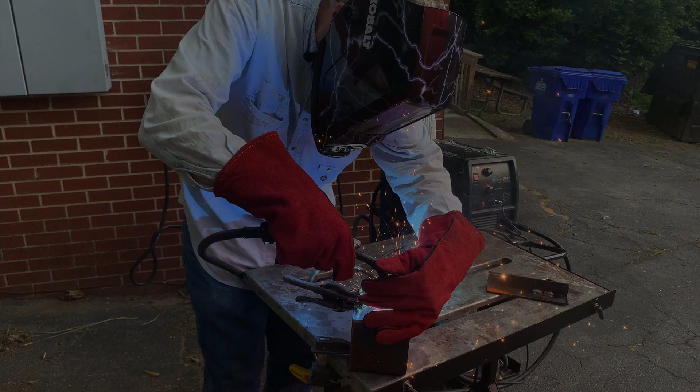Hi, I'm John Schellenberg. I'm a teacher at Renfroe Middle School, and I'm also a Decatur maker. My primary focus is welding and metal stuff. So I'm going to walk you through setting up the MIG welder today. We'll talk about some safety, some tool setup, where you'll have to go to get the key, and some of the other things that you'll need to know about the machine.

We're here on the pad right beside the back entrance to the makerspace, and the metal shed is where the tools are kept. You'll have to watch this video, take an online quiz, and then you'll need to come in for your hands-on safety check. Once you've passed those, you'll get the key, and that will let you unlock the metal shed, and you'll have access to the tools.

So you'll just slide the doors open. And this will be the machine that we're talking about today on video. This is the MIG welder that you'll be using.

So inside the metal shed here, tucked in along this wall, there's a big bin that has some welding gear, okay? And personal protective equipment is really critical for welding. The arc temperature is about 3,000 degrees, and it's lots and lots of UV light. So if you have sensitive skin, you will get sunburned on any skin that's exposed.

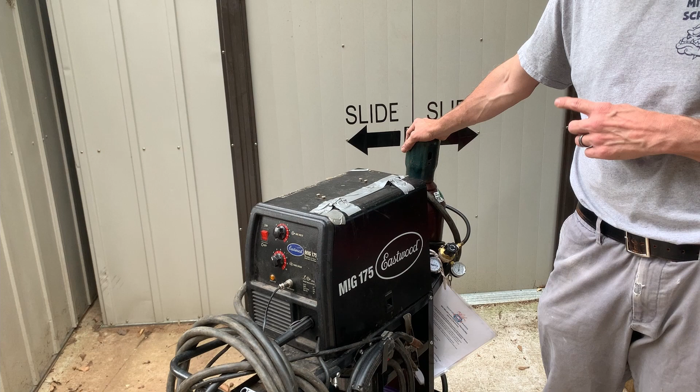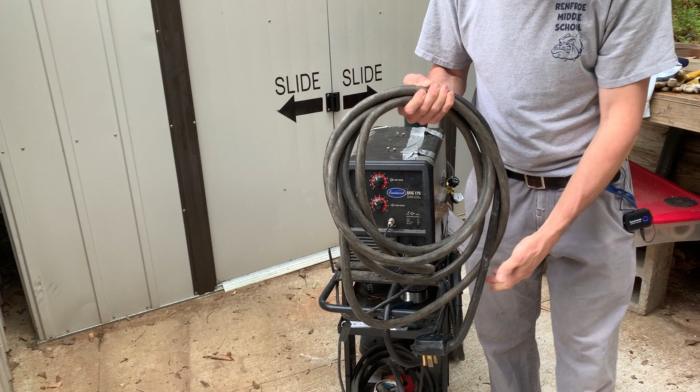All right, so starting off, what we've got here on our cart is the power cord. Okay, this plugs into 220 only. There are two 220 outlets. There's one by the back door, and there's one by the front door. If you drive a Leaf, you know where that one is.

And on the front of our machine, which we'll plug in here in a minute, we've got our operating controls. We've got the power button, and we've got the temperature or the arc voltage and the wire speed. We'll talk about how these work together when we start welding.

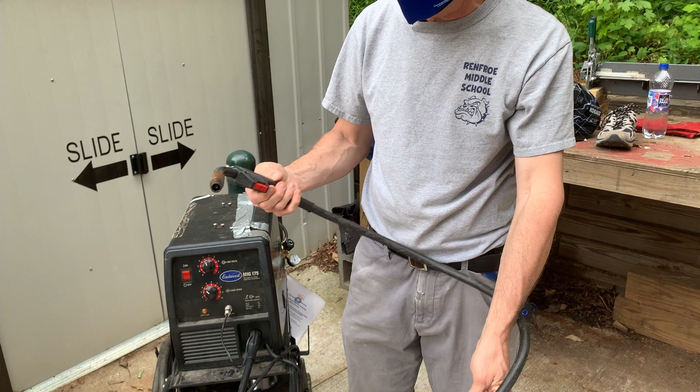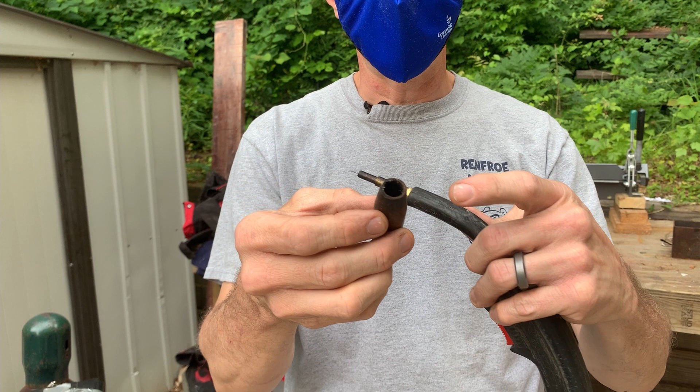We've also got a plug here that allows the machine to talk to the welding whip. Okay, and so this is what makes the magic happen. We've got a trigger here. This initiates the arc, and this will start your welding. We've got a nozzle, and the nozzle comes off by simply unscrewing it. You always want to make sure that the nozzle tip is clean on the inside, because that will fill up with some welding slag there. We'll talk about that again in a minute.

The wire comes through the machine, through the welding whip, and comes out through the end here. And this piece gets burnt up pretty easily, but it is quite easily replaceable as well. Okay, it shouldn't really ever be more than finger tight. So if you need to replace it, you may have to cut the end of the wire off, but you should just be able to screw a new tip on there.

Okay, if you notice the little tiny hole here, that's where the gas comes out. So if you don't have the nozzle on, it's not going to protect your weld, and we'll talk about what that looks like and sounds like here in a minute. Okay, so you have to have the nozzle on, and the wire kind of needs to be sticking out a little bit when you get ready to weld.

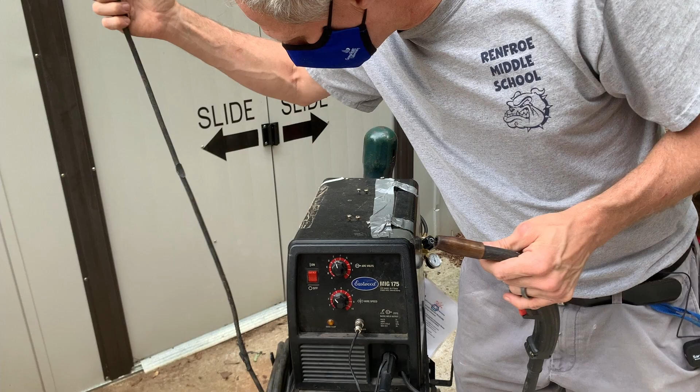The other important part of welding is the ground. So what happens here is basically you ground your work, and the machine basically creates a short with the wire. So that fuses the metal together. So if you don't have your ground clamp attached to your work, basically it's not going to work. Okay, so we'll talk about that a little bit more when we get some metal out and we actually do some welding.

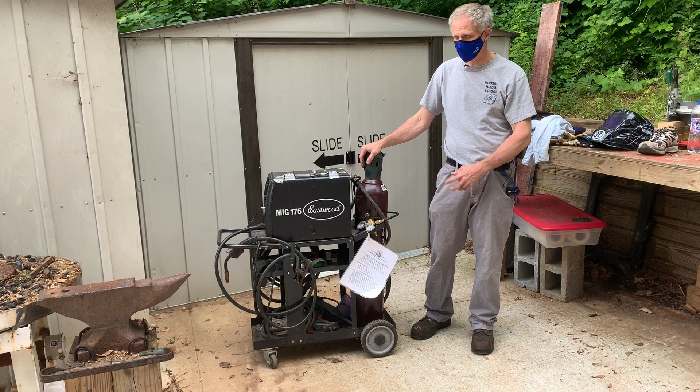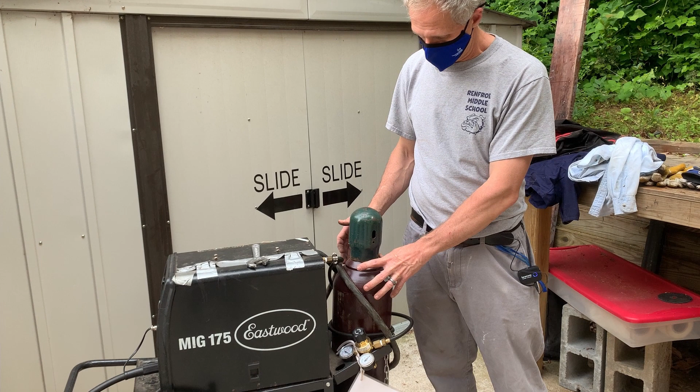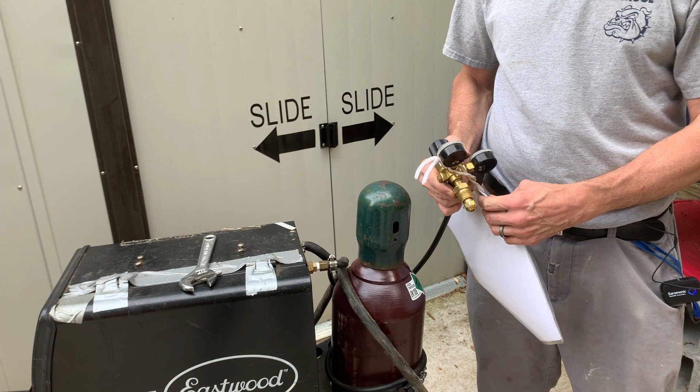Before we move to our welding spot, I'm going to talk about how to put the regulator on correctly. Again, never transport the welder with the regulator attached to the gas bottle. These things are about up to 2,500 psi, and if the gas bottle tips over and the regulator breaks off, it basically turns into a missile. So always transport the welder with the gas bottle with the green helmet on, or whatever color the cap is.

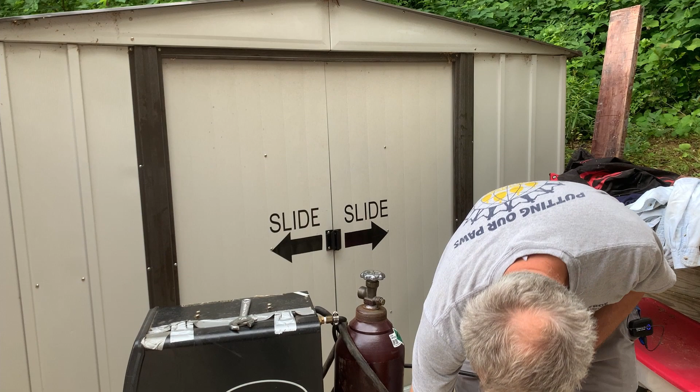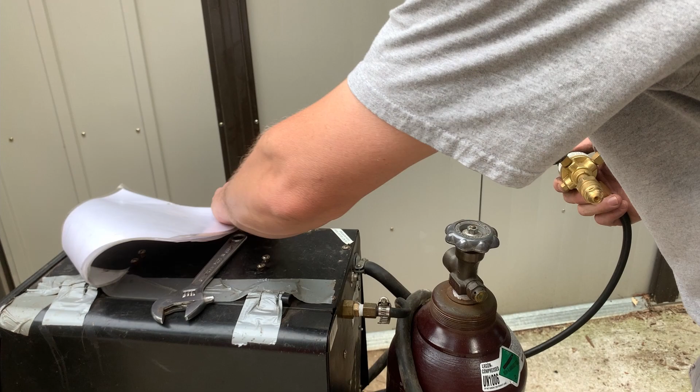To put the regulator on, you'll just untwist the cap and take it off and set it on the side of the welder right here so that it's always with the welder. Then you'll take your regulator and you'll need to position the regulator with the outlet of the bottle, and then you're going to want to screw this part in. Okay, this is the sealing surface, so you really want to make sure that that's clean and not been nicked. This should always stay in a protective bag.

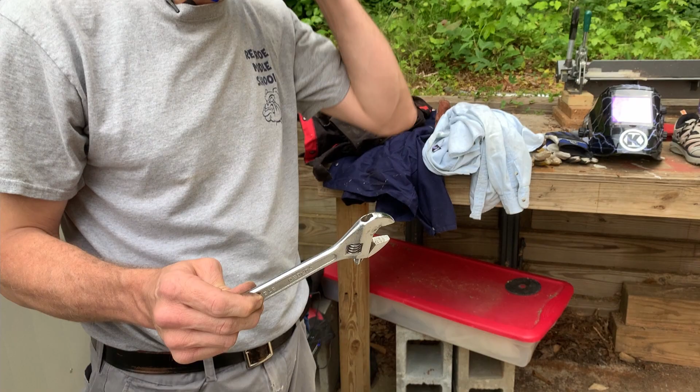Hand tighten it, and then you need to grab an adjustable wrench like this. Do not use pliers. I repeat, do not use pliers or vice grips. It needs to be this wrench or an equivalent. Okay, you just want to snug it up. All right, don't overdo it, just snug it up, and then you can take your wrench off.

Okay, these gas bottles seal all the way open, so you have to untwist, and there are directions here for closing and opening. You have to untwist all the way out until it locks in the open position. Otherwise, the needle inside the bottle will leak. Even if this is tight, it will still leak out of the handle. So always make sure this is locked out all the way open. Okay?

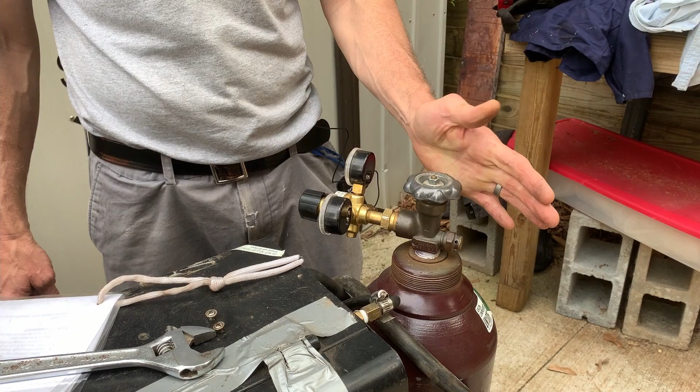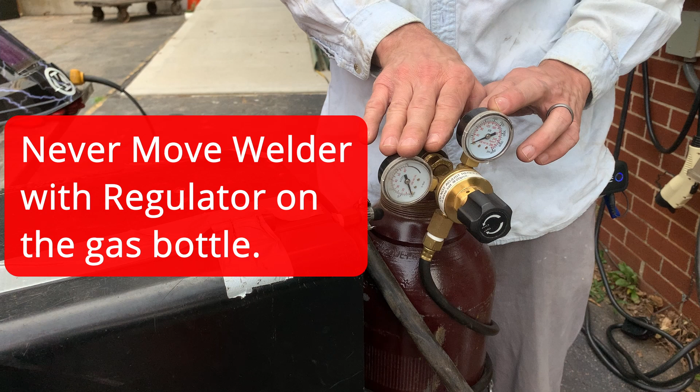We've moved the welder from the metal shed and the pad down to the front of the building where the 220 outlet is. All right, and this is the front building here. So what we're going to do next is talk about our gas settings on the regulator. I moved the welder down here with the cap on, and now that we're almost ready to weld, we have put the regulator back in place, and we've tightened it up with our adjustable wrench, and we're going to turn it on and set the gas to the right volume and flow.

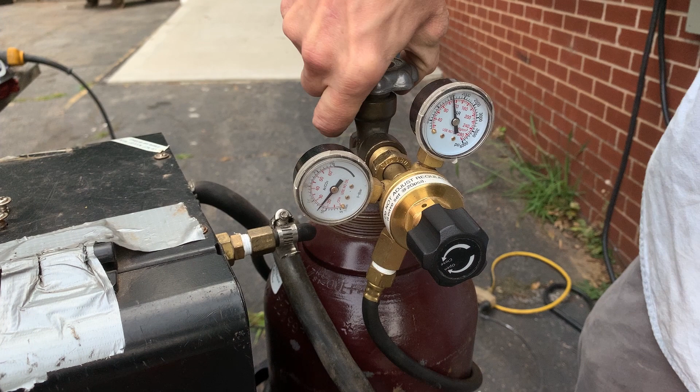Remember, you want to turn this gas nozzle all the way on until it's tight in the up position. You've got two gauges here. This gauge talks about the pressure inside the tank. A full tank is probably 2,500 psi, and an empty tank is down to about 100 psi. You don't ever want to run a tank out, or moisture can get in and that damages the inside of the tank.

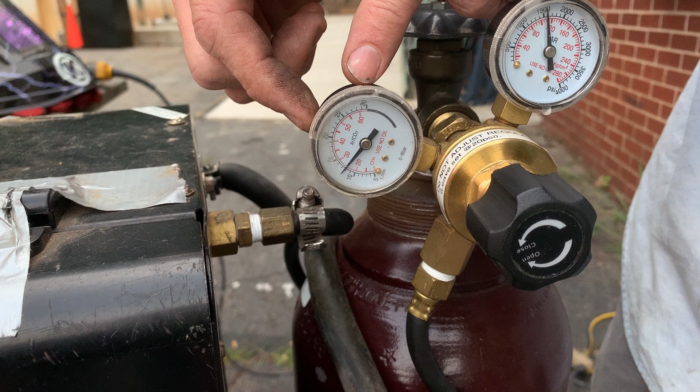On this gauge, you want to have your working gas flow at about 20 CFH. That's the red, okay, the inner red. Right now it's at about 25, but as soon as I start welding, it's going to dip down to 20, and that's about where I want to be, okay? That reminder is right here on a sticker, all right? There may be times where 20 is a little too much, and there may be times where 20 is not quite enough, but that's a pretty good place to start for everybody's general welding use.

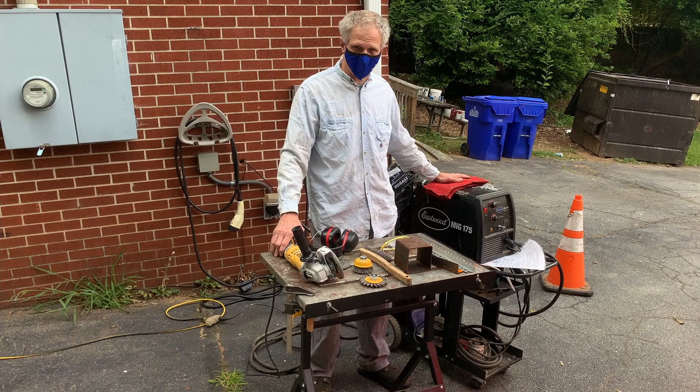So we're in position to weld now. We got our welder down, we've hooked our regulator up. We moved the welding table from the metal shop down here. This gives us a really solid base to work on, and most importantly, it gives us a position to ground

our work with. Okay? We've also got our welding curtain set up, and the purpose of the welding curtain is to keep passersby, traffic, and people walking on the sidewalk from experiencing a flash burn from seeing the welding bead. So that's protective for other people that aren't here wearing a welding helmet.

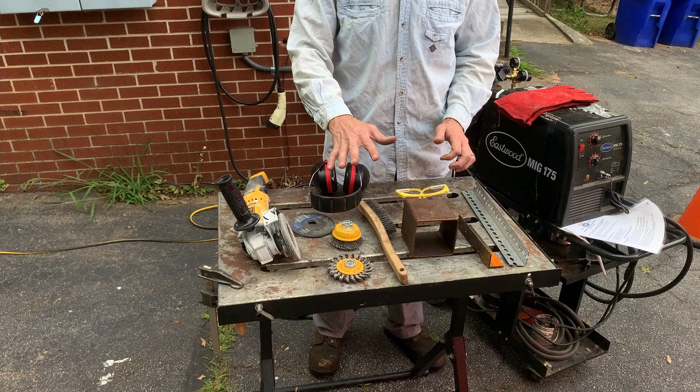Now, on our welding table right now, we've got a couple pieces set up. I've got a couple different pieces of metal. I've got some additional safety gear that we're going to wear, and we've got a couple of different grinding tools. So I'm going to put my safety gear on first, and we'll talk about some of the metal that we've got here.

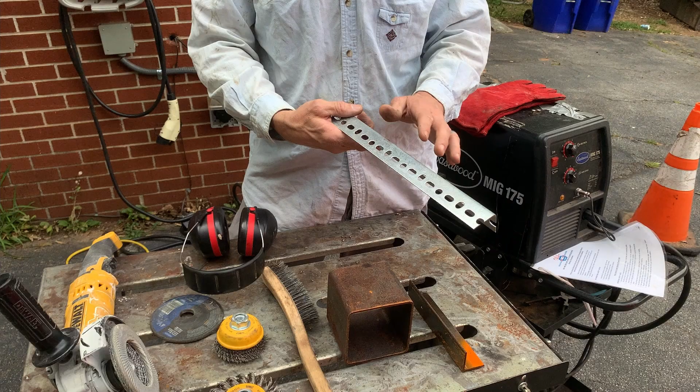Now, hopefully you bring your own metal, but if you're here to practice, there's a couple things I want you to keep in mind. This racking material is pretty toxic if you weld it. I'm not sure if it's galvanized or if it's zinc plated. It's probably zinc plated, but it's going to burn and create a really, really toxic gas that comes off.

Galvanized things like chain link fencing poles and other things that are designed to be out in the weather are even more toxic than this. So if you're going to be welding those, you need to have a proper respirator on and things like that. I don't know that there's any of that stuff here, but if you bring it to the space to weld, please be really, really careful. You only get one set of lungs for your life, so definitely wear a shield or a breathing apparatus.

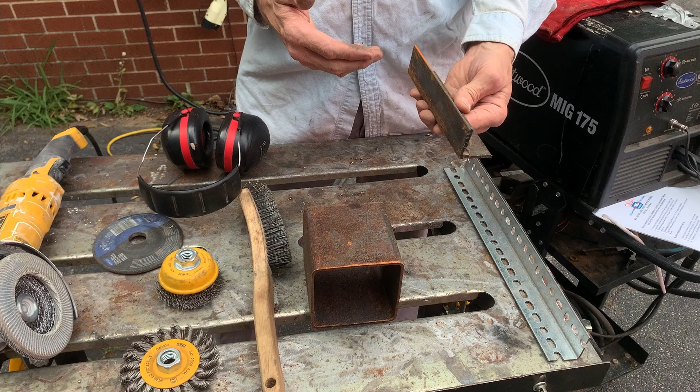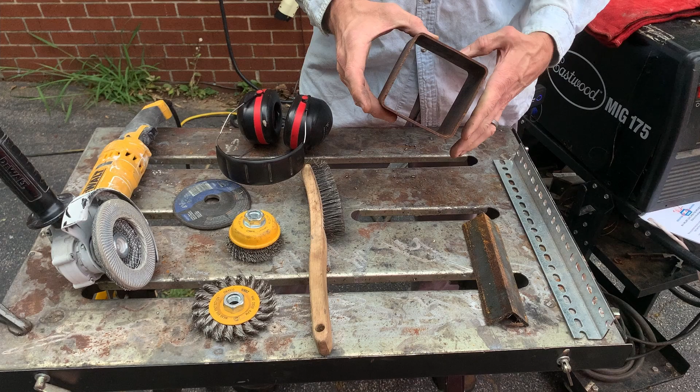Now on our other metal, these are just pieces that I found in the practice bucket, and they're pretty dirty. They're not going to weld very well. Okay, they'll probably stick together if we wanted to, but we definitely need to clean off the rust. In particular, if we're going to weld along the edge here, we need to clean probably as much of it as we can. Definitely the lip, the edge, and as much of the inside as we can reasonably.

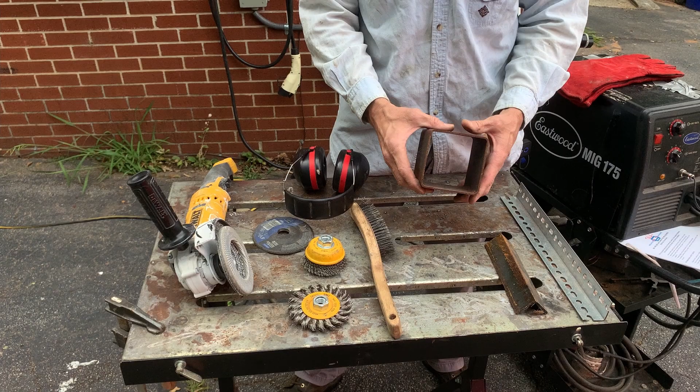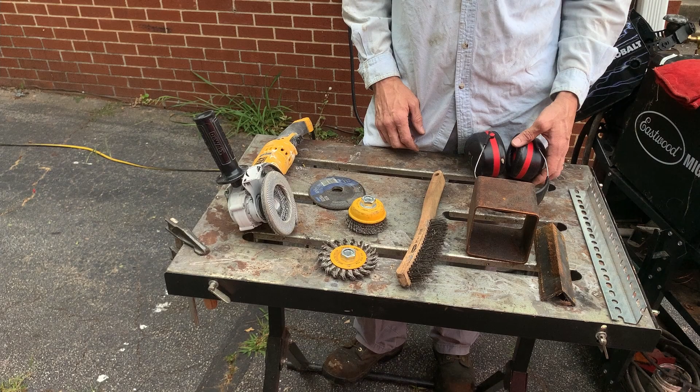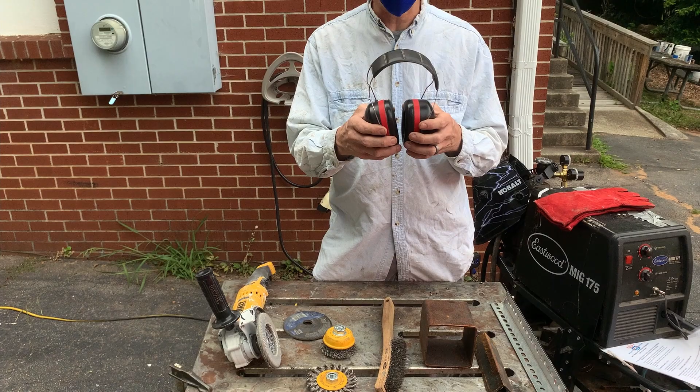Now to do that, we've got a couple of different tools. You've got a manual brush that you can use. You've got grinders that are inside the metal shop, so we just brought those out here with an extension cord. If you use the grinder, you definitely want to use ear protection because they do get loud. And you're always just going to do one little thing and it turns out to be more than you want. So just put them on before you use the device.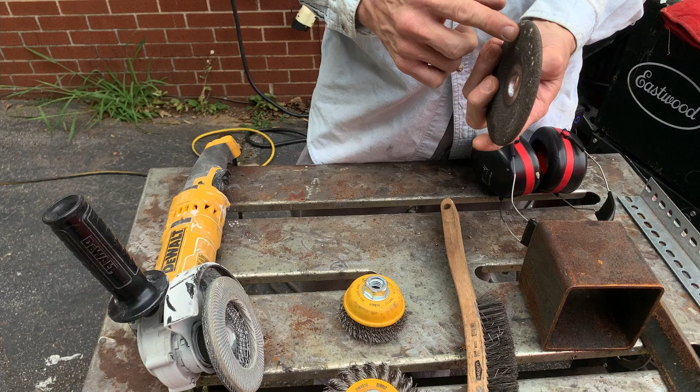If you're going to do a lot of grinding, then you want a heavy disc, an actual grinding disc. If you're just going to take some rust off, then there are a couple of different brush options. There's a knotted brush or a twisted brush. There's a straight brush, and there's actually a knotted cup. This is called a cup brush. There's actually a knotted cup brush that has the twisted bristles, but in this shape.

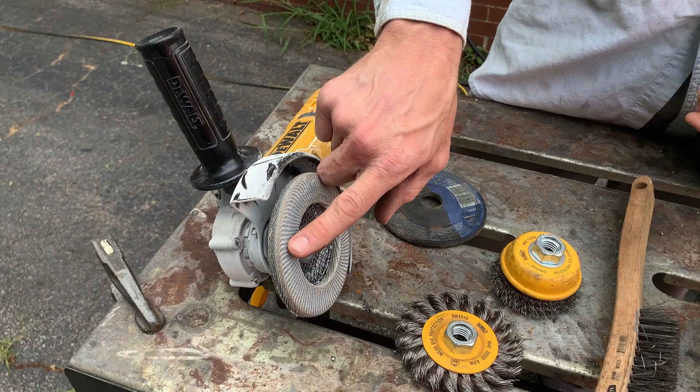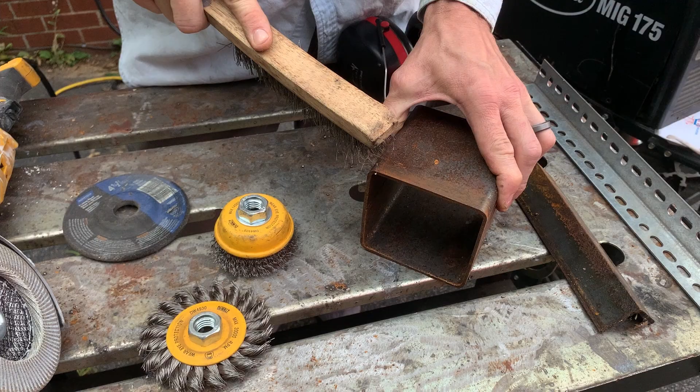What's on the machine right now is called a flap wheel, and this is a really good polishing tool. So if you do your welds and you want to take some of the weld off the surface to make it look a little flatter, then this is probably the device you want to use. For right now, I'm going to try the manual brush, and we're just going to try and take a little bit of rust off the edge here so we can see if we can weld that. We really only want to press in one direction and not go back and forth.

And you can see that gets most of the rust off, but there's still some rust inside the material. So we've got the surface rust off, but you can still see a little bit of scaling there. So it's probably time to move to a mechanical disc. In this case, I'm just going to use the flap wheel.

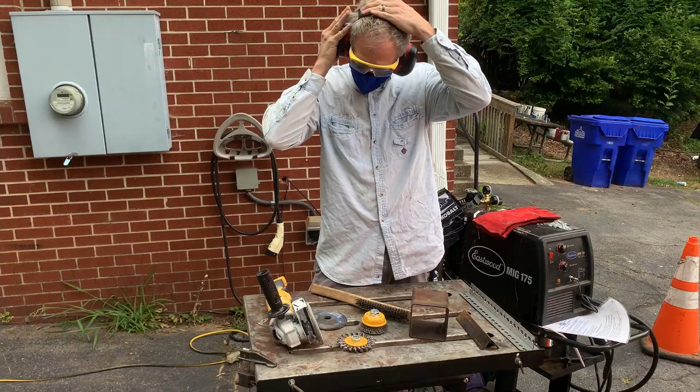We've moved our workpiece to the corner here, and I put the clamp on because I need to hold this device with two hands, one to turn it on and one to steady it. So the clamp here is going to keep my piece from flying off the table. Okay, here we go.

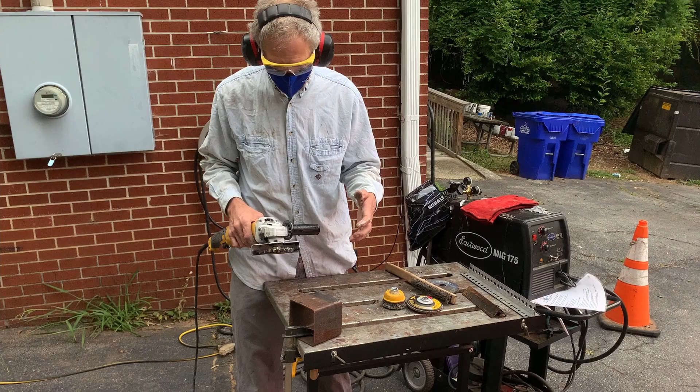We cleaned that with the flap disc. I changed it, and you'll have to watch the tool video to see the changing procedure. But I've put on the knotted brush, and I'm going to clean this edge with the knotted brush so we can compare the finish here and see what we're ready to do when we weld.

So always wait until the end of the brush, the cup, disc, whatever it is, has stopped spinning before I put it down. You can imagine this thing jumping off the table if you put it down and that brush makes contact with the table. So we really want to make sure that that is off before we set it down.

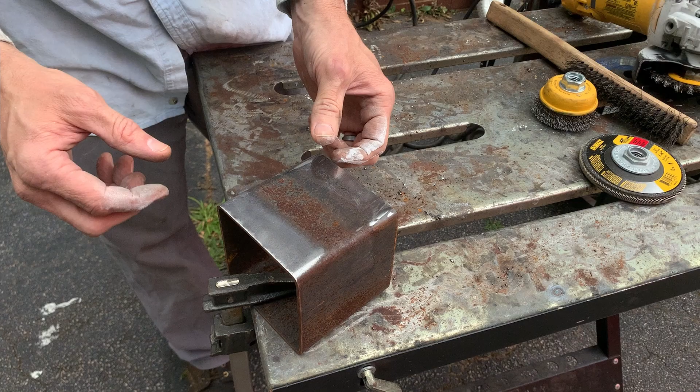All right, so you can see the difference here. This side actually ground off some of the surface rust and some of the base material, whereas this side is a little bit rougher, and it's cleaned off the rust down to the base material. If you notice the brush jumping when I tried to do the edge, that's just something that happens, and that's probably just not the right tool to clean such a thin piece of metal. But either one of those sides are now ready to weld versus the finish that we got with our hand brush.

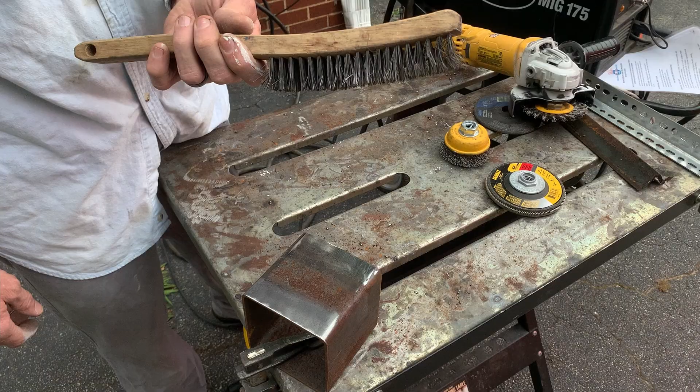We've got our welder set in place. We've got our regulator attached. It's plugged in. We are going to now look at settings that we're going to need to use to weld the material that we've chosen to weld. On this side, so I guess left side of the front, you'll pull this little handle up and flip this door open, and you'll see the filler wire and the drive roller, the tensioner, and then these are the positive and negative poles for the welder.

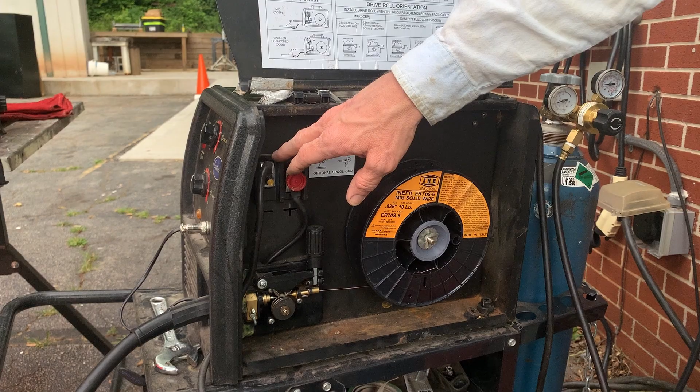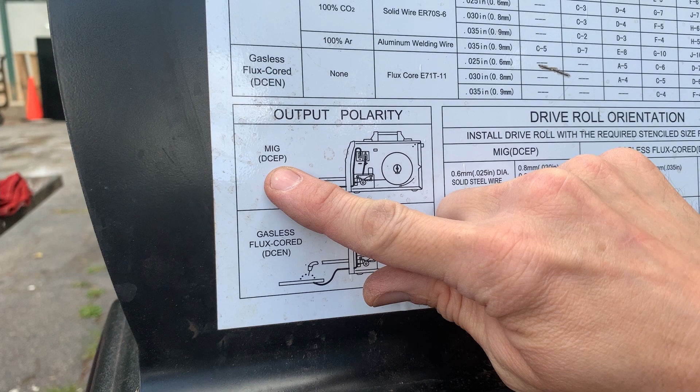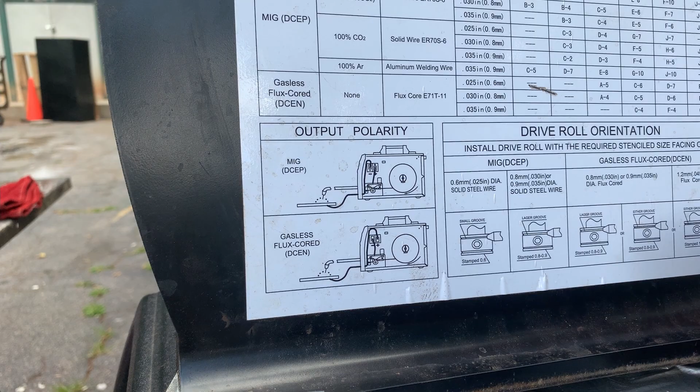All right, and our little tour of things on this side is our output polarity. So for the most part, we're always going to use MIG, which needs to be DC welding, and the EP stands for electrode positive. The other type of welding that's possible with this machine is flux core welding, where you don't use a welding gas. And to change to flux core welding, if you ever need to, you have to switch the positive and negative leads of the welder. So let's go back down and we'll take a look at where we find those things to fix them.

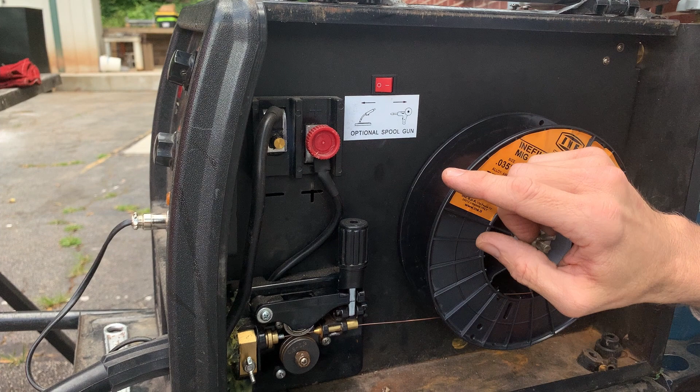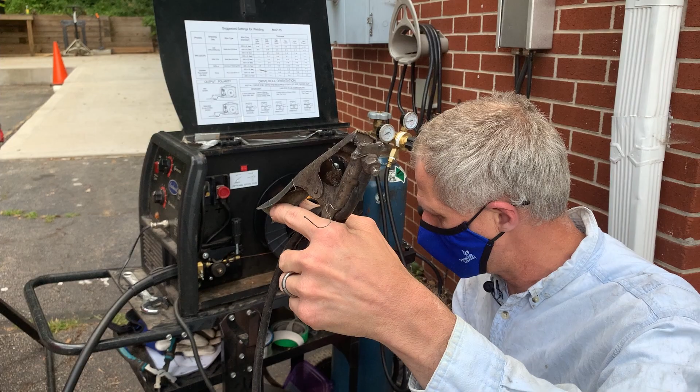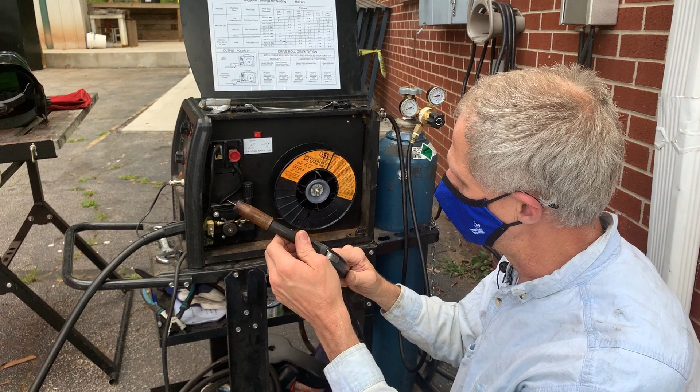You'll notice a big positive here and the red button, and this little tiny negative here, and this basically goes to our ground strap. So, sorry, let me reach through here real quick. So basically, what we've got here, if we trace our wires, we've got our ground strap that goes in, and that goes to the negative pole of our welder. And then this wire comes down and goes to the welding head of the welder, to the welding lance. So this positive for MIG welding has to be here, okay? And the ground strap has to be on the negative if you're using solid wire. So that's the way we have it set up now.

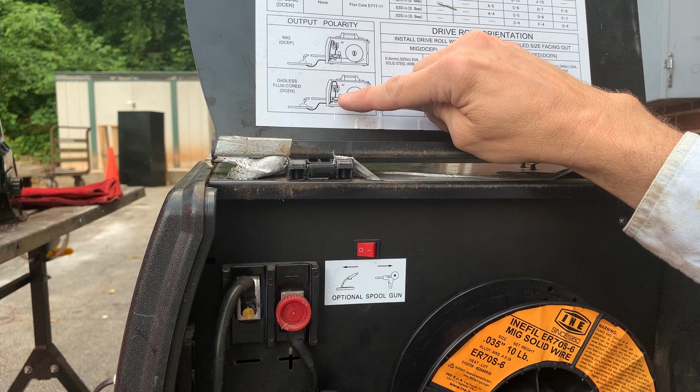If you change to flux core, you'll have to flip the welding rod to the negative, and you'll have to flip the ground to the positive, and that shows you up here on the sticker where it says gasless flux core, DC electrode negative. Okay, so just make sure if you're using solid wire that you're on electrode positive, the way the machine is set up right now.

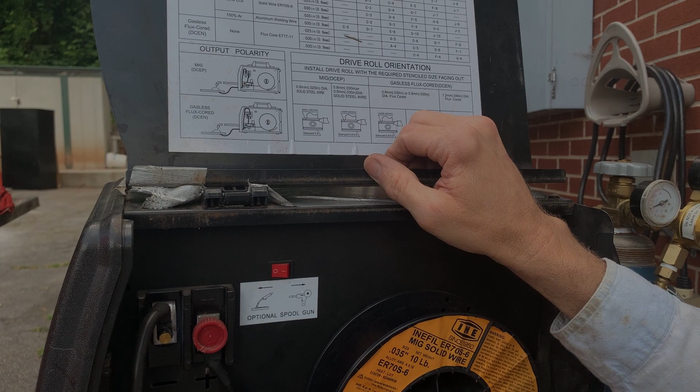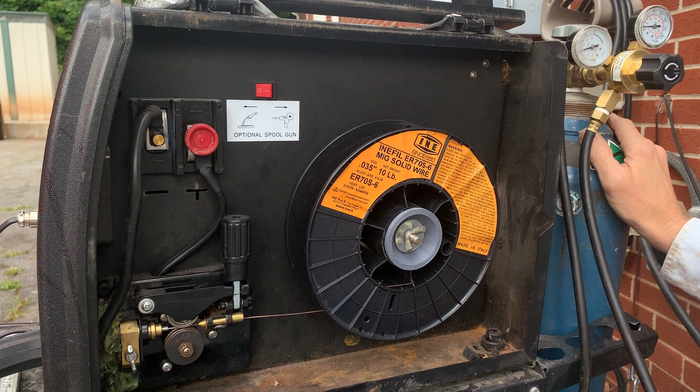When you're welding mild steel, you're going to be using this type of filler wire. This is a solid wire, which means you need to use a shielding gas versus a different type of wire that has a shielding material inside. We don't have that kind here, so you're probably not going to have to worry about that. But so this material, the important number here is this size. So this is 35 thousandths in diameter.

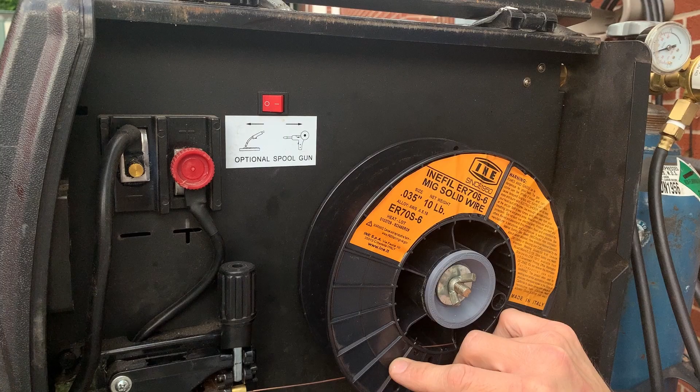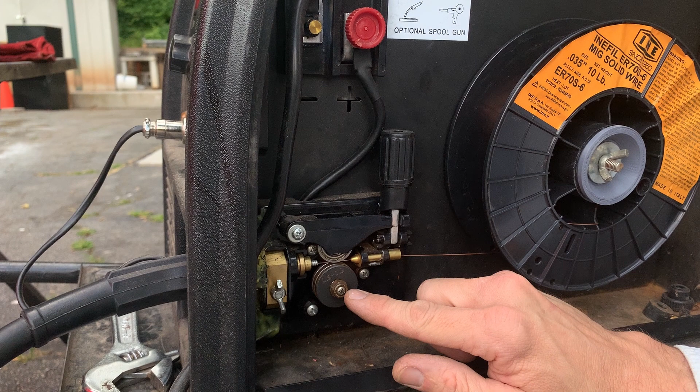And what matters about that is you're going to use a special side of this drive roller right here. So this part of the machine drives the wire through the welding head and into the weld. And so we need to make sure that the setting on this is correct. And there are basically two grooves in this little wheel. One is for thin wire and one is for thick wire. And 035 is thick wire.

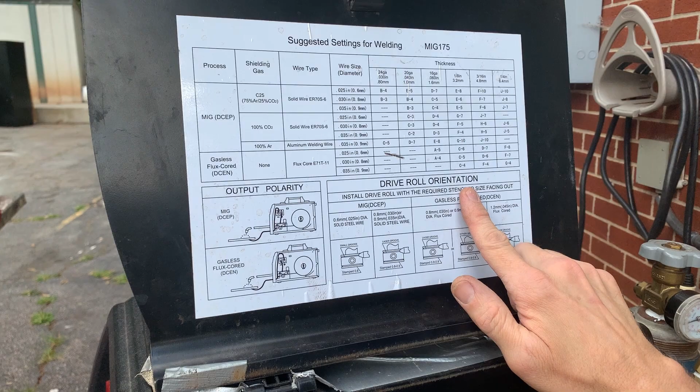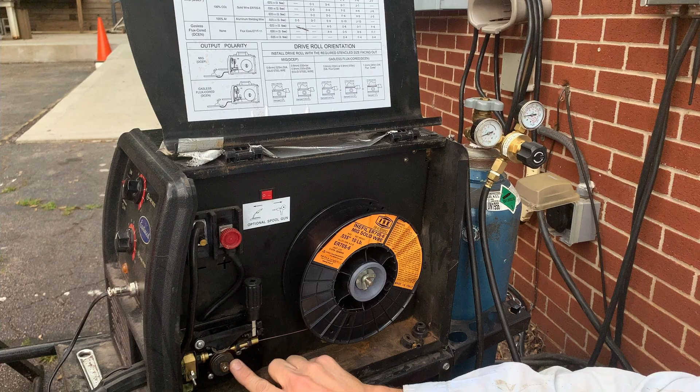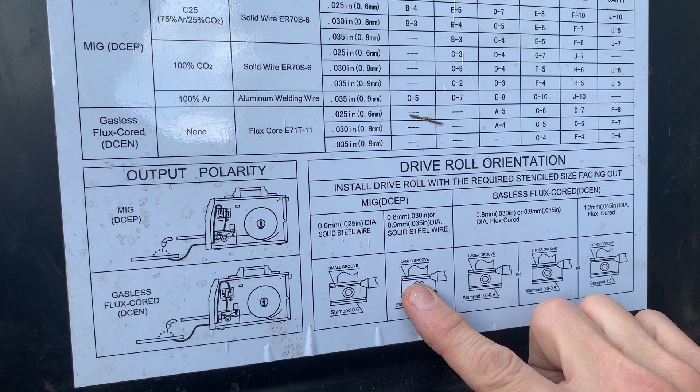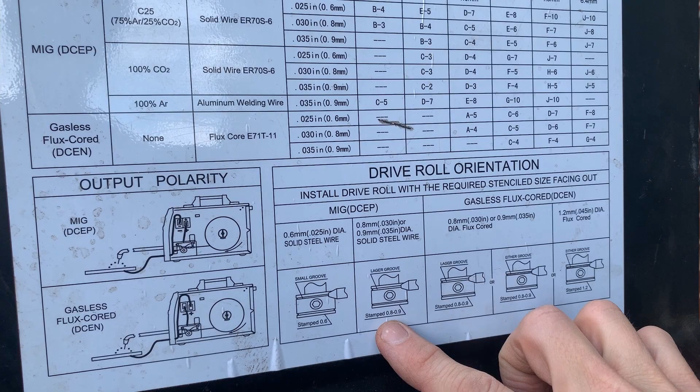So we're going to go upstairs here to this sticker that has our suggested settings and our drive roll orientation. And we just want to make sure that if we're using 035 wire, we have the drive roller set to the right size groove. So I find 035 wire, it's solid steel. And so I want to make sure the larger groove, this would be the tip where the wire is coming out, and I want to make sure the larger groove is next to the tip and the outside is stamped 0.8, 0.9. So let's take a look at the drive roll again.

And we can see the stamp 0.8, 0.9, and the nozzle is here, and so we know that we are aligned properly now for this size wire. We've got the piece that we cleaned up, and now we're going to set the settings on the welder.

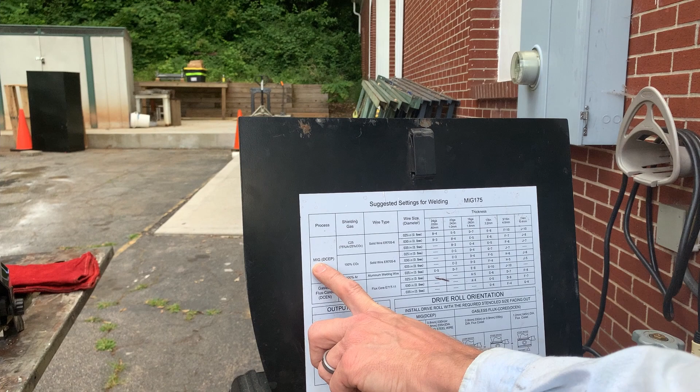So I've measured the thickness of the material, and the thickness really makes a big difference here. So we know the thickness, we know what kind of gas we're using, we know what wire we're using, so now we're going to use all that information on the matrix up here. So we're using MIG welding with C25 gas, and that says that on the sticker. We have this filler wire, and it is 0.035 diameter.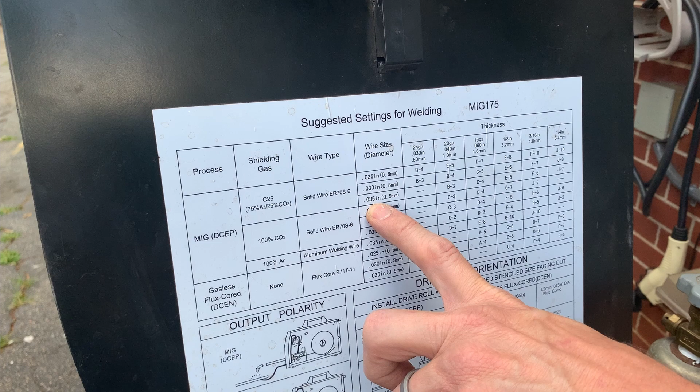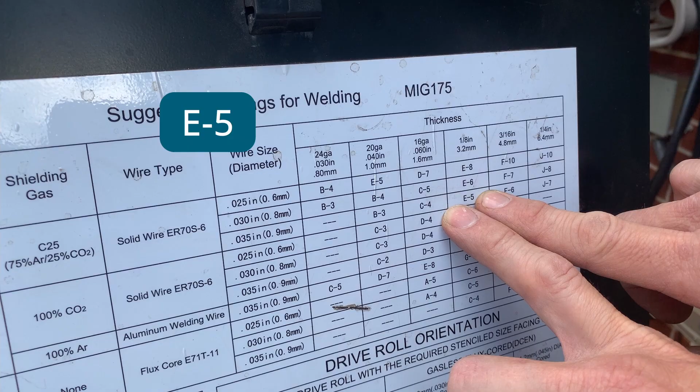Now the piece that we're welding is 1/8 of an inch thick, so we're going to use this setting, E5. Okay? Now on the front of the welder, we have two dials. One for arc volts, that is A through J. That's basically what we call the heat. And we have one for wire speed, that is 1 through 10. Okay? So the suggestion here is E5. So we're going to use that setting, and we'll fire it up here in just a sec.

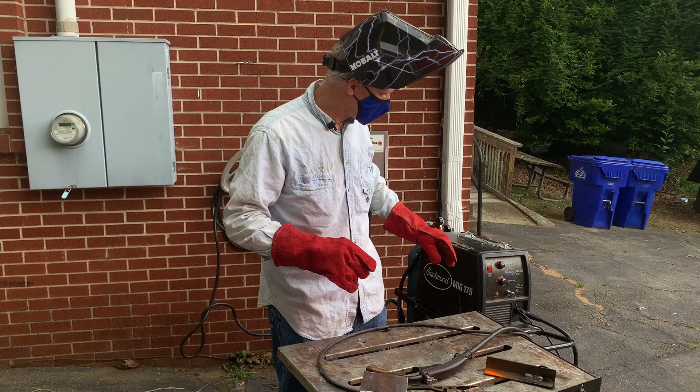We've got our machine set up. We've got our material clamped down to the table. So let's get our gear on, turn the machine on, and do a little welding. Making sure my gloves cover my cuffs. I make sure that my helmet is turned on the inside, and that my setting is set for my eyesight and preference. Now I'm going to turn the machine on with the red on button.

And I've also got our safety shield to sort of block the arc from people on the street who shouldn't be looking at it. So I'm going to turn my machine on. I'm going to turn the bottle on all the way, turn it all the way open until it's tight at the top. I set my regulator before, so we don't have to worry about that at this exact moment. And so now all that's left is to properly ground our work and do some welding.

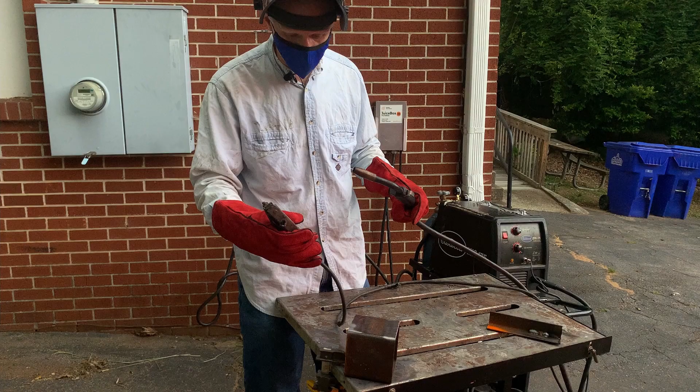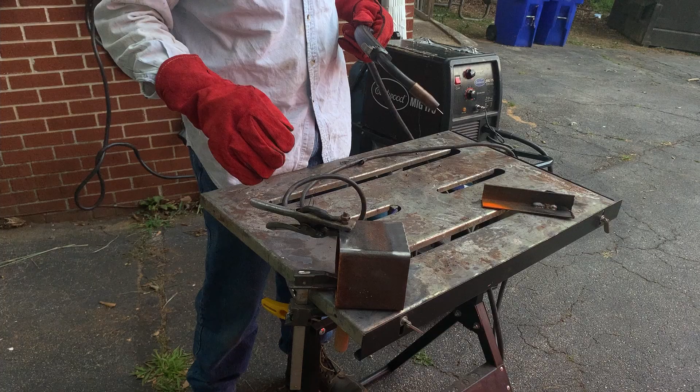So I'm going to use one of the spots that I cleaned for the welding for the clamp, and I want to make sure that it's grounded really, really nicely. If I clamp it to the table or I clamp it to a rusty side, the ground may not be good enough to allow a good weld.

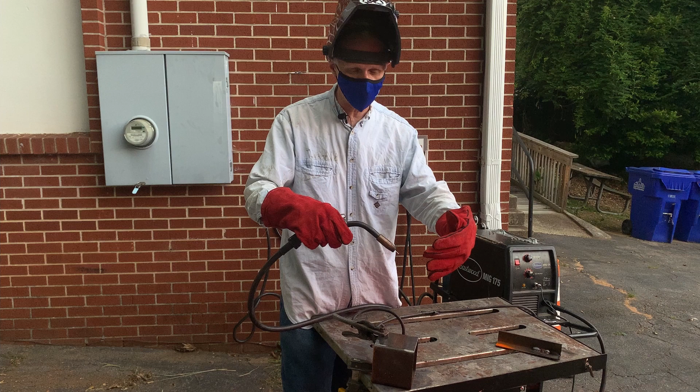So, sorry folks, since our camera person doesn't have a welding shield on, I'm going to block the light from the weld with my glove. But you should be able to see what's happening, and then I'll show you the weld as soon as I stop.

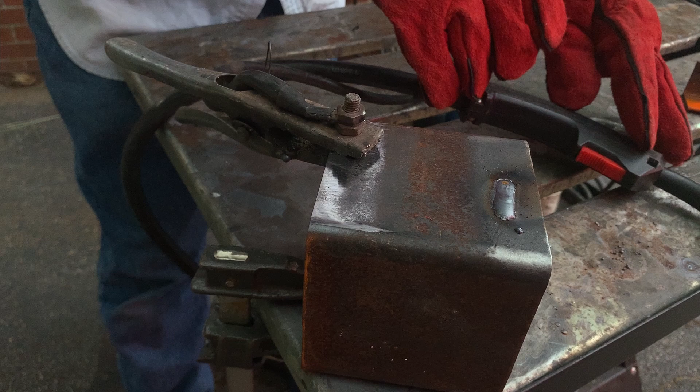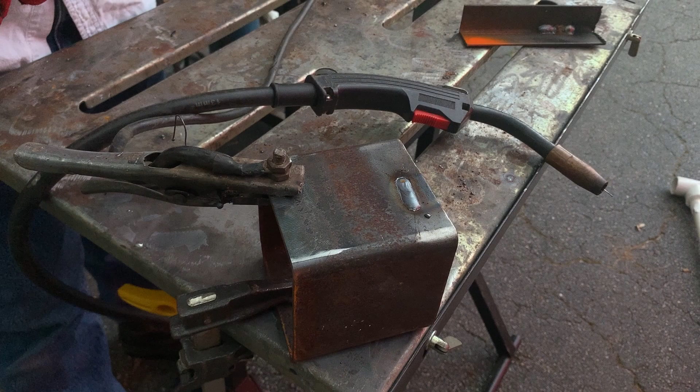All right, now that's a nice clean weld. It was on nice clean material, but you can see some of the burn, some of the stuff that's going to happen. You've got a little BB right here, and all of the sparks and stuff that are going to fly off the weld. That's the reason we want to wear the closed-toed shoes and the long gloves and the shirt, and sort of protect our surroundings from all of that slag metal that blows off the weld.

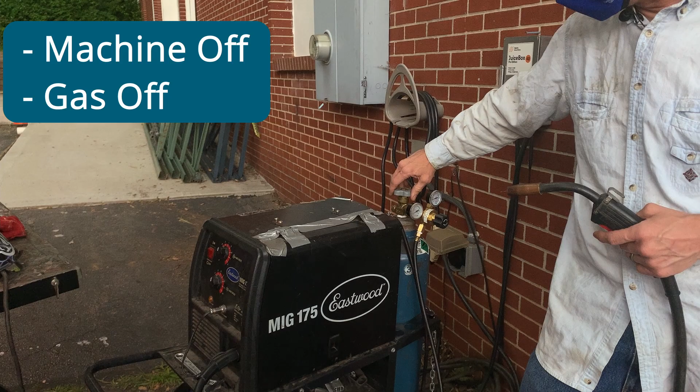We finished our weld, and now it's time to shut the machine down, take the regulator off the tank, and move the device back into the storage facility. So the first thing we're going to do, we turned our machine off when we got done welding, but now we're going to turn the gas off. So we're going to turn all the way down, okay? And we need to bleed off the line that goes to the gas, to the welder, okay?

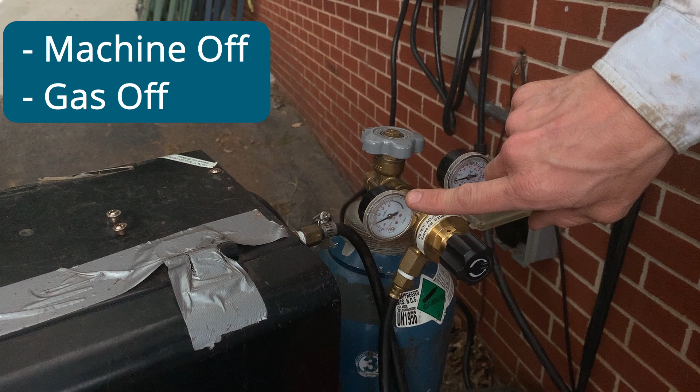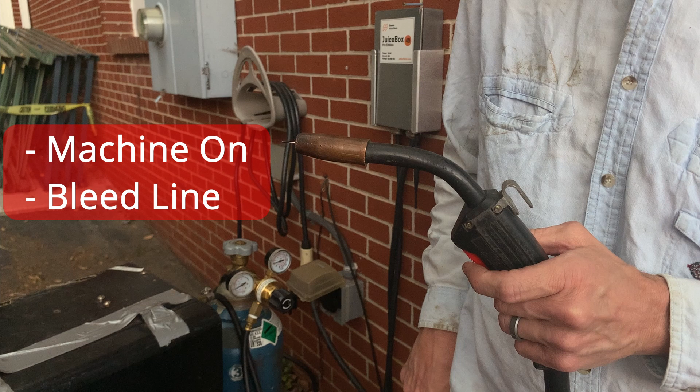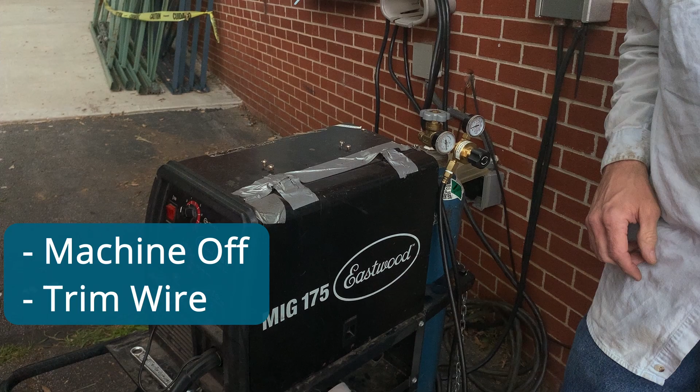So I'm going to turn the welder back on for just a second, and I'm going to squeeze the trigger until I see this gas go back down to 0. It takes just a second. Now I can turn the machine off, okay? And I'll need to trim this wire off so that it doesn't get stuck on stuff or poke people. But now my regulator has been bled of pressure, and I can disconnect the regulator, put the cap back on the bottle, and then the machine is safe to transport back to storage.

We finished up our weld, we packed up our stuff, we brought the shield back up, we brought the welder back up, and we've put everything back into the shop. So now it's time to close the doors. Just slide them shut. Make sure that the lock gets locked, and that you take the key and you put the key back inside the key box inside.

If you had any trouble with the welder, or you need to report an incident, damage to the welder or trouble or whatever, email info@Decatur Makers, and somebody will get back to you pretty quickly.